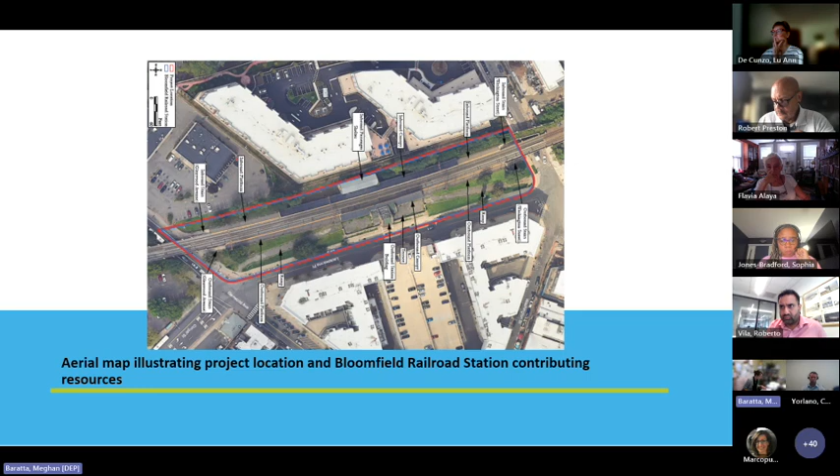As described in the nomination, Bloomfield Railroad Station is an exceptional architectural and engineering achievement that distinguishes itself from other early 20th century DL&W Railroad suburban stations for its innovative and artful use of ferroconcrete and as a distinguished example of proto-modern architecture that includes Beaux-Arts elements. The manipulation of the materials and fittings is unique to the station and exhibits an honest expression of the material, sparing use of ornamentation and careful consideration of the massing parts.

This shows the outbound passenger station. The original nomination was completed in 1984 and did not identify character-defining features of the station. The HPO agrees with the applicant's consultant that some significant architectural design elements of the Bloomfield Railroad Station consist of the following: the overall footprint, massing, and orientation of the station buildings, pedestrian tunnel, platforms, canopies, and stairs, all of which contribute to the architectural significance of the entire railroad complex.

Any surviving original historic materials, including the glazed brick in the pedestrian tunnel and poured-in-place concrete elements that feature a mix of exposed aggregate and smooth finishes, the half butterfly canopy design at the inbound and outbound platforms, poured-in-place concrete, overall fenestration pattern, glazed rookwood tile ornamentation on concrete exterior walls, gable roof lined with parapet gable ends, clay roofing tiles on the outbound station, riveted metal canopy on the outbound station, arch porte cochere at the outbound station, concrete embankment wall with terrace ramps.

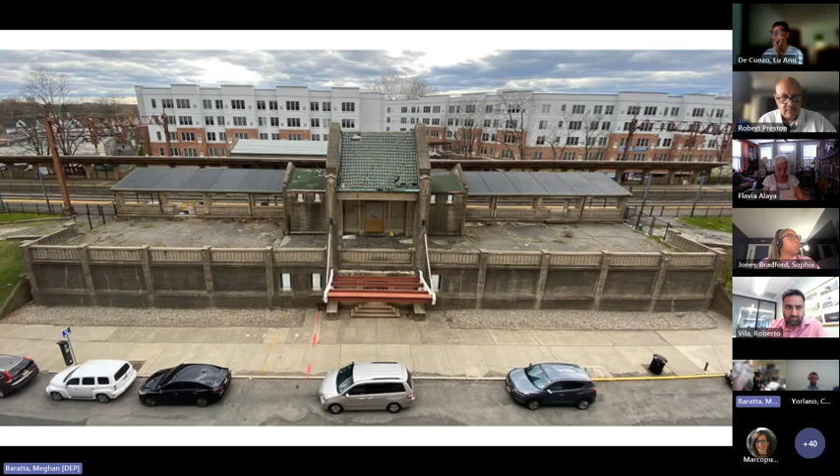The project is being funded through the New Jersey Debt Defeasance and Prevention Fund, which has set aside $48 million for improvements at Bloomfield Railroad Station.

Bloomfield Railroad Station is currently owned by Bloomfield Township. Bloomfield Township and New Jersey Transit are currently in negotiations for New Jersey Transit to take ownership of the property. To date, no formal agreement has been signed between Bloomfield Township and New Jersey Transit regarding the transfer of ownership.

The station requires various state of good repair and site improvements to the grounds, station buildings, platforms, and pedestrian tunnel. It also requires modifications for compliance with the Americans with Disabilities Act.

New Jersey Transit's preference for full accessibility includes providing level boarding via high-level platforms for the full length of the station's inbound and outbound platforms.

The outbound station building and pedestrian underpass tunnel connecting the inbound and outbound station buildings are dilapidated from years of neglect and in poor condition. The outbound building and underpass tunnel are currently closed to the public. They require extensive rehabilitation to bring them into a state of good repair and to allow them to be reopened for public circulation.

The grounds and retaining walls on the outbound side of the station, as well as the concrete stairs and retaining walls at either end of the platform on both sides of the station, also require restoration.

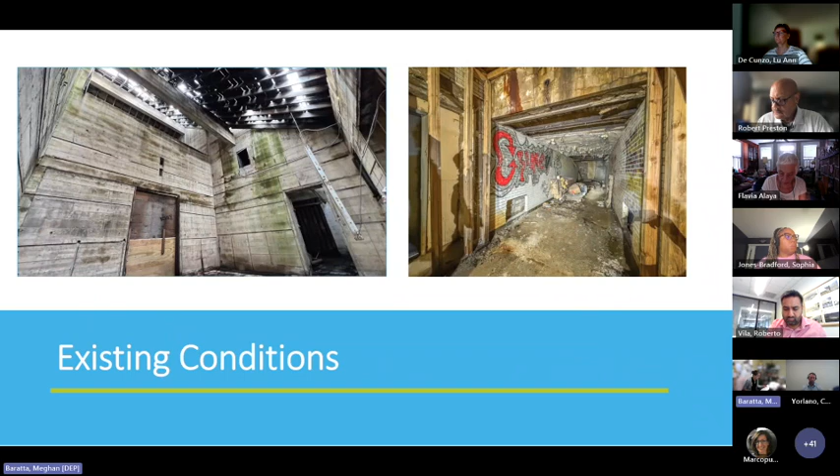The following exterior project elements are part of the preferred alternative as submitted by New Jersey Transit and do not meet the standards. The historic inbound and outbound low-level platforms are proposed to be demolished.

A new high-level cast-in-place concrete platform is proposed to be installed at 4 foot 3 inches above the top of rail on both the inbound and outbound tracks. The increase in height would put the new platform high above the existing historic balustrade.

A landing well would be created in front of the existing inbound station building's doors, at the platform level. This landing well would be necessary to provide access between the existing inbound station waiting room and the new high-level platform. This landing is similar to the configuration at the entrance to Newark Broad Street Station.

New ADA compliant stairs would be provided on the north side of the landing, and a new ADA accessible ramp would be provided on the south side of the inbound station, south of the station complex.

The existing platform canopies will be removed and replaced with structural steel and metal canopies to allow for increased headroom clearance because of the 4 foot 3 inch change in height of the platform.

New Jersey Transit states that the proposed new canopy roof would be a similar half butterfly shape as the existing canopy, but the material will not be the same.

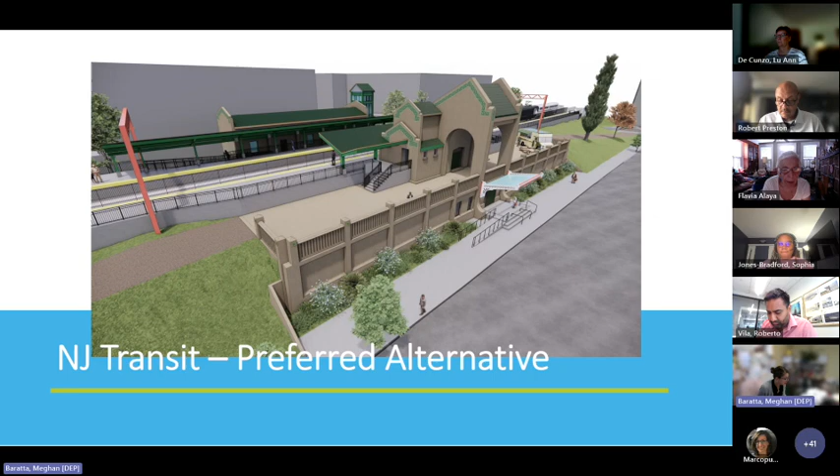In a technical assistance letter from the HPO to New Jersey Transit, the HPO provided the following guidance for ADA accessibility: that USDOT FTA gives guidance for ADA review, level boarding, and between-car barrier for commuter rail. It describes the review, analysis, recommendation procedures, and reporting requirements expected by the Federal Transit Administration and the project management oversight contractor regarding recipients' compliance with level boarding and between-car barrier provisions of the regulations issued by the U.S. Department of Transportation.

New or altered stations serving commuter, intercity, or high-speed rail lines or systems, in which track passing through the station and adjacent to platforms is shared with existing freight rail operations, the railroad operator may comply with the performance standards by using one or more of the following means: level entry boarding, car-borne lifts, bridge plates, ramps, or other appropriate devices; mini-high platforms, with multiple mini-high platforms or multiple train stops as needed to permit access to all accessible cars available at the station; or station-based lifts.

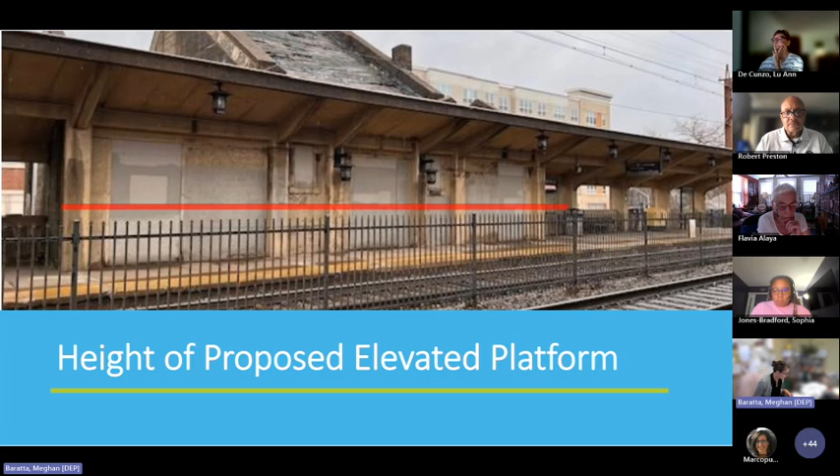New Jersey Transit considered the following 8 alternatives. Alternative 1, no build. In this alternative, New Jersey Transit considered a no build option. There would be no direct physical effects to Bloomfield Railroad Station.

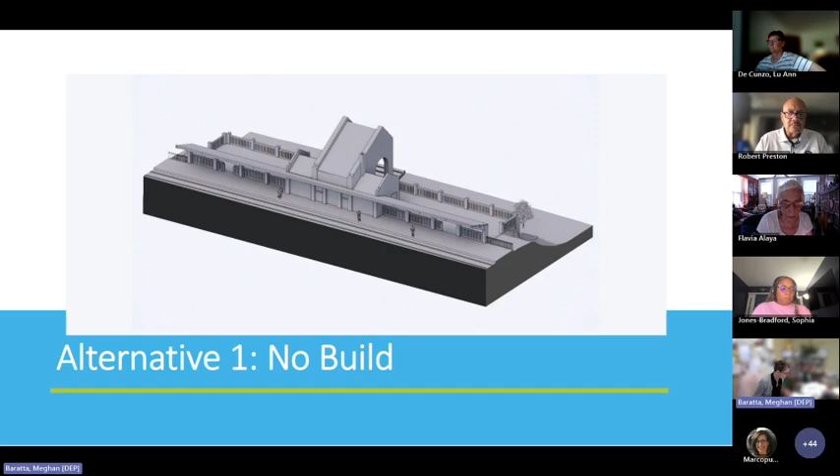New Jersey Transit decided that this alternative would not meet the project purpose to improve passenger experience or address the need for ADA accessibility, nor repair or restore any of the historical features of the station, leaving the already significant state of disrepair conditions present to deteriorate further.

Alternative 2, mini maxi high platforms. In this alternative, New Jersey Transit considered ramps, otherwise known as mini high platforms, and larger ramps the size of a train car or longer.

The project scope in this alternative includes retaining existing outbound canopy, and a majority of the inbound canopy would be retained except for the ends of the canopy. Existing platforms under the existing canopies would remain.

Existing platforms beyond the ends of the existing canopy would be replaced with mini high or maxi high level platforms. Ramps and stairs would connect the existing platforms and high level platforms. New elevators would provide accessible routes level to existing platform levels.

Landings with roofs would be added for access from the top elevator stops to platforms. Stairs at the ends of the platform would be renovated and extended to the new platform, and existing areas of the station building would be rehabilitated.

According to the application, this alternative does not accomplish New Jersey Transit's goals for accessibility with level entry boarding for the full length of the station's inbound and outbound platforms because it limits passengers with mobility needs to only 2 cars on the train.

According to New Jersey Transit, there is a considerable distance to the accessible path into and out of the station. It also creates the potential for a false expectation of level disembarkment, and the mini maxi high platforms would have no shelter.

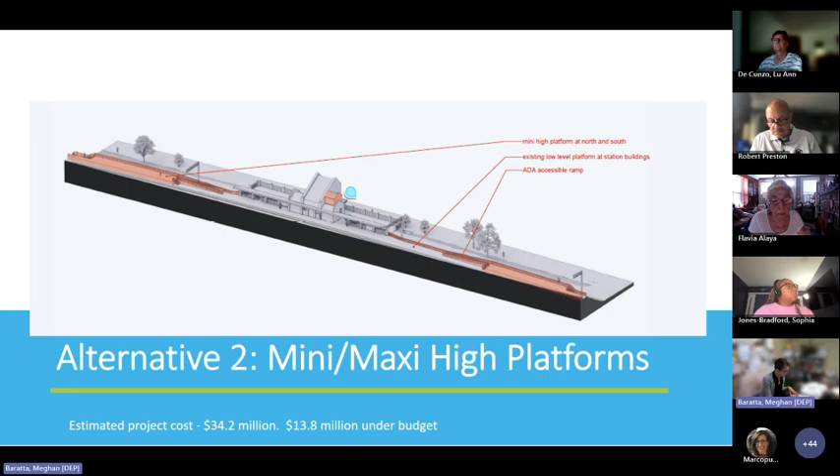Estimated project cost for this alternative is $34.2 million and is $13.8 million under budget. This alternative meets the project purpose and need while retaining the historic integrity of the station complex and is the most appropriate design under the standards.

Alternative 3, shifting the platform location. In this alternative, New Jersey Transit proposed to shift the platform location so that a high-level platform equal to the length of the existing platform would be provided either north or south of the existing location of the station, with a ramp providing access underneath the existing canopies.

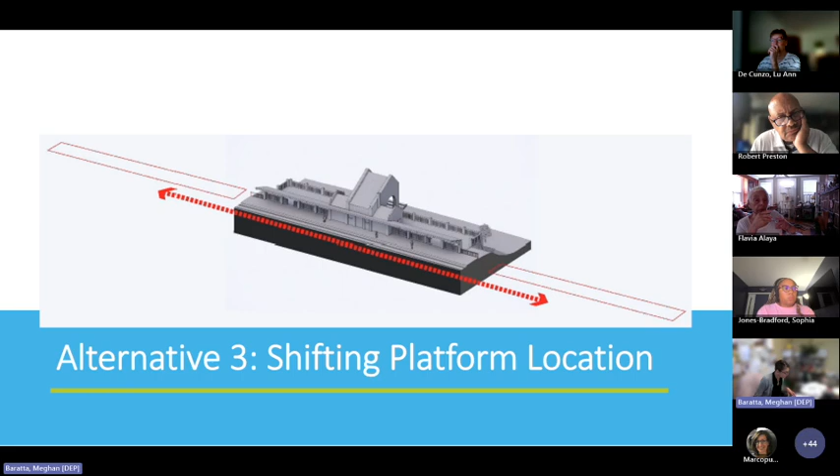This alternative was not fully explored because it would require land acquisitions, making it an infeasible alternative due to cost. Project cost was not estimated.

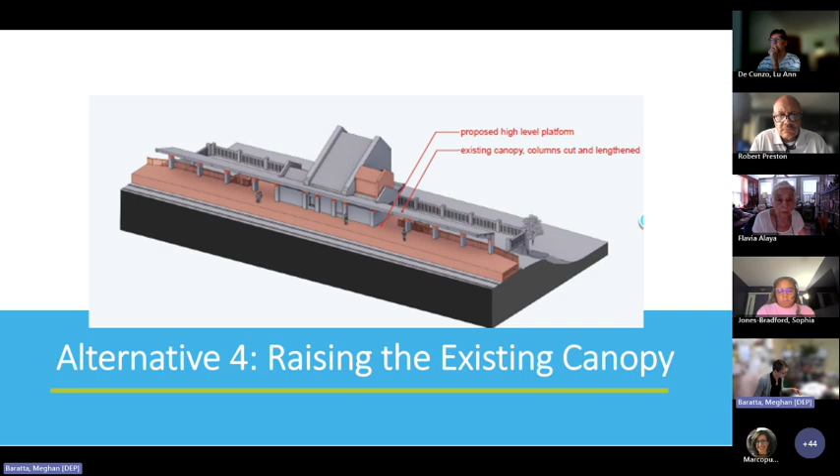Alternative 4, raising the existing canopy. In this alternative, the existing canopy would be raised. This would include cutting the existing canopies at the columns, lifting them in place, elongating the columns, and reattaching the canopies. This alternative was dismissed due to engineering and cost concerns. Project cost was not estimated.

Alternative 5, blending existing and proposed canopies. In this alternative, as noted in the application, New Jersey Transit proposes to replace a section of the existing concrete canopy with new steel canopies. Most of the historic canopy would remain with reduced platform area below. This alternative would retain the existing canopies, except at access points to the elevator and stairs, with new raised canopy bays at these locations.

The existing platforms would remain under the existing canopies. Beyond the end of the existing canopies, a new full-width, high-level platform would be added beyond the ends of and under the existing canopies. New partial width, high-level platforms towards the boarding side of the platform would be added.

New elevators would be installed to provide accessible routes from street level to high-level platforms. The massing of the existing outbound building would be raised to accommodate the hoistway requirements. The stairs would be renovated at the ends of the platforms and extended up to the new platforms. Existing areas of the station building would be rehabilitated, and the existing platform areas would remain under existing canopies, but would be inaccessible.

In this scenario, the majority of the existing canopies remain and a portion of the existing platforms remain. The full length of the platform would be usable for passengers boarding and exiting levels within the existing station buildings, and the existing station buildings remain largely intact.

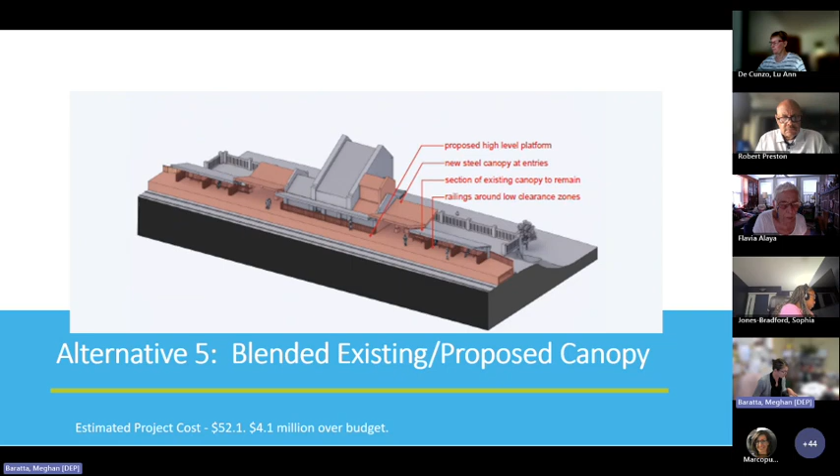Alternative 6, existing canopy removal without replacement. In this alternative, New Jersey Transit proposes to completely demolish the existing historic canopy with no new canopy installed. New Jersey Transit acknowledges that the drawback in this alternative is that passengers would not have shelter on the platform, thereby reducing passenger comfort and experience compared to the existing station condition.

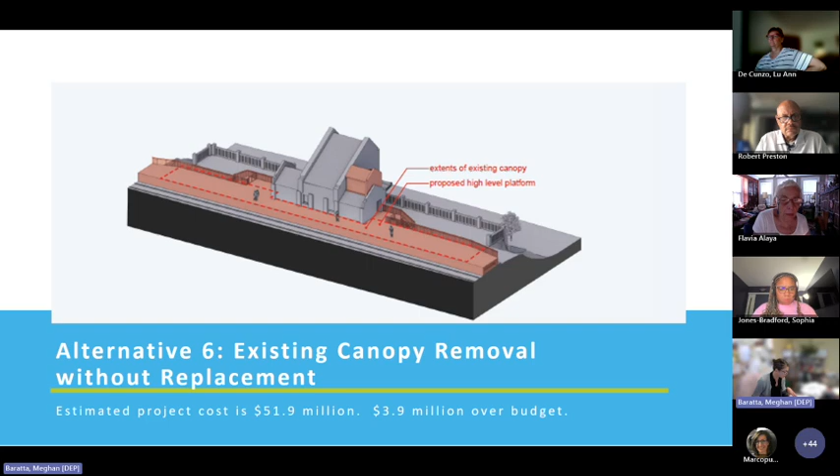Estimated project cost for this alternative is $51.9 million and is $3.9 million over budget.

Alternative 7, full canopy replacement. In this alternative, New Jersey Transit proposes to demolish the existing canopy and replace it with a new steel canopy to maintain the existing canopy coverage at both platforms.

The existing platforms and canopies would be replaced in their entirety with high-level platforms and higher canopies. New elevators and ramps would provide accessible routes from street level to raised platform level. The massing of the existing building would be altered to accommodate the hoistway requirements in the outbound station building.

Landings with roofs would be added for access from the top of the elevator stops to the platforms, and the waiting room at the inbound platform would remain at lower level with a ramp and stair to the raised platform. The stairs at the ends of the platform would be renovated and extended up to the new platforms, and the existing areas of the station building would be renovated.

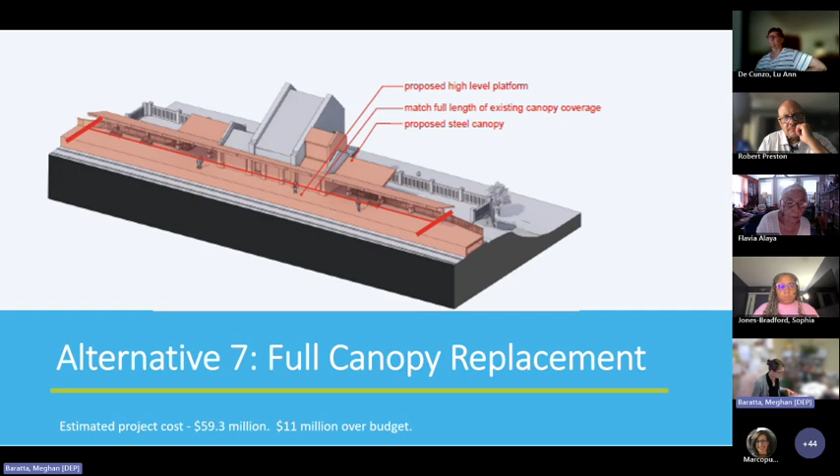No analysis was given as to the benefits or deficiency of this alternative. The estimated project cost for this alternative is $59.3 million and is $11 million over budget.

Alternative 8, partial canopy replacement. This is New Jersey Transit's preferred alternative. In this alternative, New Jersey Transit proposes to demolish the existing concrete canopy and replace it with a new steel canopy with 30% coverage at the inbound platform and 15% coverage at the outbound platform.

New elevators and ramps would provide accessible routes from street level to raised platform level. The massing of the existing building would be raised at the outbound station building to accommodate the elevator hoistway requirements, and landings with the roof would be added to access from top elevator stops to platform.

The waiting room at the inbound platform would remain at the lower level with a ramp and stairs to the raised platform. The stairs at the ends of the platform would be extended up to the new platforms. All other existing areas of the station building would be renovated.

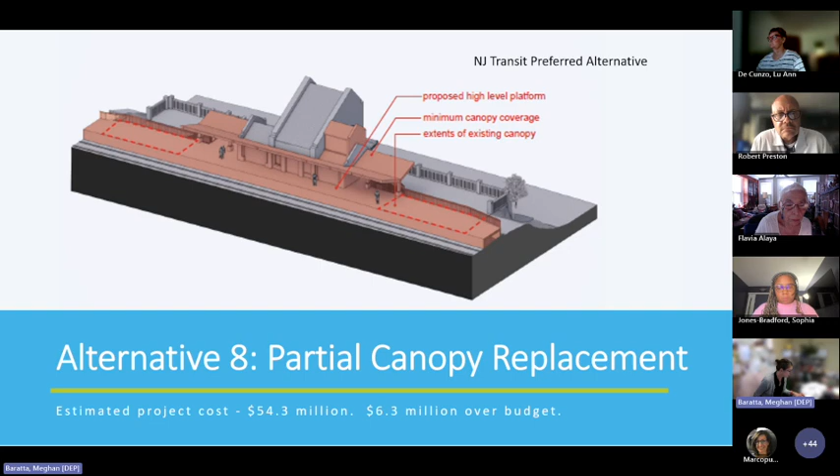No deficiency in this plan was provided by New Jersey Transit. The estimated project cost is $54.3 million and is $6.3 million over budget. This is the applicant's preferred alternative.

On July 31st, 2024, HPO learned of Amtrak stations that use MobiLift CX, a multi-purpose wheelchair lift that can be wheeled by train conductors to the train car where it is needed, thus enabling every train car to be accessible without negatively impacting the architectural integrity of the historic resource.

On August 1st, 2024, HPO staff shared the MobiLift CX platform brochure with New Jersey Transit staff for consideration in this project design. HPO staff has not received a response as to whether or not this alternative was viable at this station. New Jersey Transit has proposed the following measures to mitigate the encroachment.

HPO review and consultation: we would conduct consultation with New Jersey HPO to ensure the design of the proposed project is guided by and responsive to the standards to the extent feasible, to ensure the design, character, materials, qualities, and workmanship of the rehabilitated Bloomfield Railroad Station are compatible with the historic and architectural character of the overall station complex.

As part of design consultation, the NJHPO would be provided an opportunity to review the design plans at 30, 60, and 90% stages of design development, as well as review the 100% design package prior to the initiation of the construction bidding process.

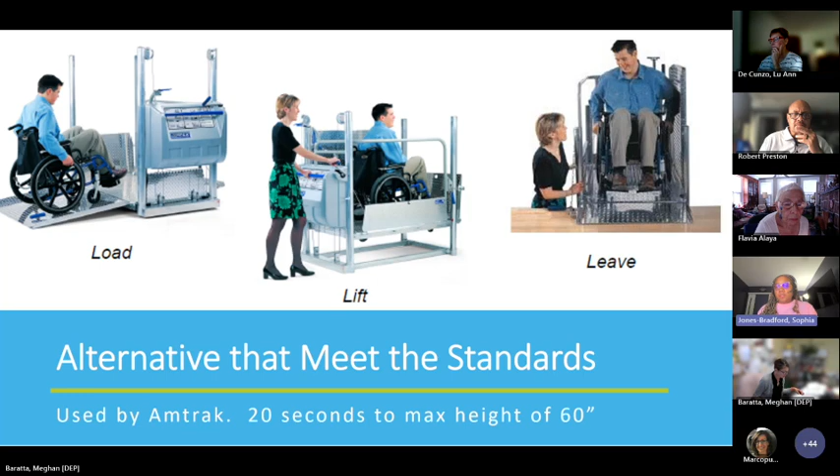Sorry, just someone that's asked, fine. Are you intending to progress the slides, or leave them? No, slide this up. What I'm reading is what New Jersey Transit is proposing to us. So it's HABS Level 3, and then the last one is a model of Bloomfield Railroad Station. So this is all in your resolution.

New Jersey Transit proposes to design and fabricate a three-dimensional model of the original Bloomfield Railroad Station to be placed on permanent display within the interior of one of the station buildings to document and preserve the original design of the architecturally significant station. Development of the model could be informed by laser scanning of the railroad station and review of available original drawings for the station complex.

The model could be accompanied by an interpretive display and combined with the recommended mitigation measures for interpretive signage or display. In addition to the physical three-dimensional model, a digital model of the Bloomfield Railroad Station is recommended to be designed and made available on a publicly available website that would also include other interpretive materials to detail the architectural and historical significance of the station, its architect, and the DL&W Railroad.

The other interpretive material could include, but not be limited to, historic photographs, images, illustrations, drawings, and other digital media that facilitate documenting and detailing the station's history and significance. So that is all the mitigation that New Jersey Transit is proposing.

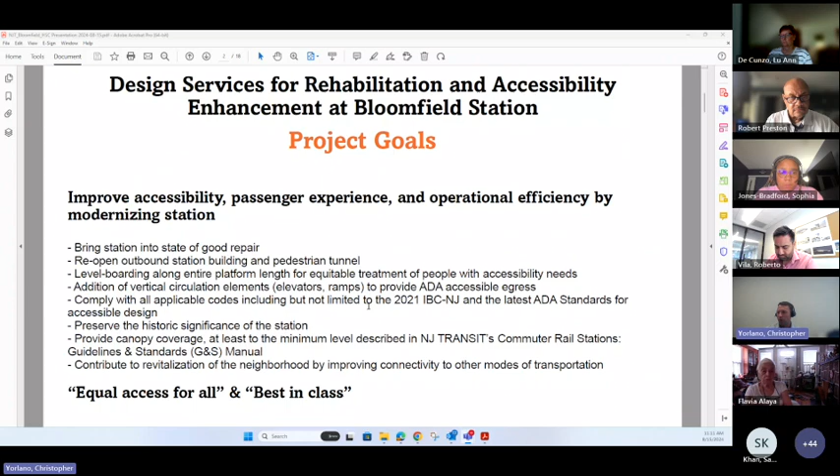There's a lot of transit-oriented development going on currently in the surrounding community of Bloomfield. When we talk about this, what we're really looking for is how we can provide equal access for all while also creating a best-in-class design at this station.

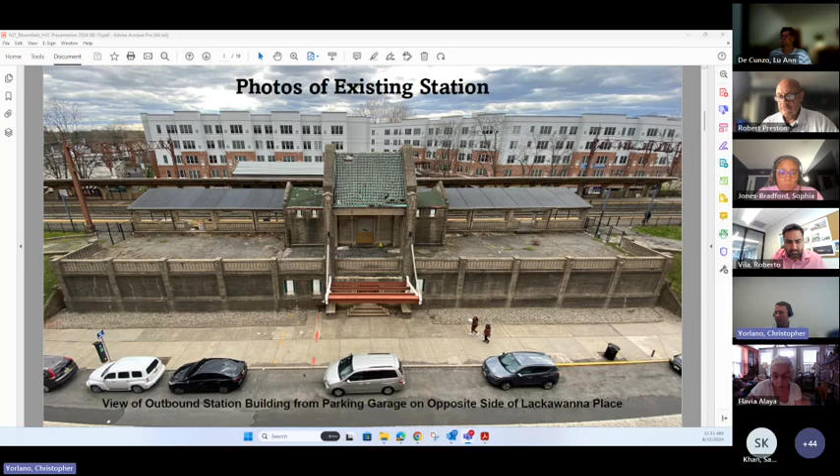We've seen this photo already from the previous presentation. Just to show you again some photos of the existing station - you have the outbound building here as viewed from the parking garage across Lackawanna Place, where we can see that the outbound building is in a state of disrepair.

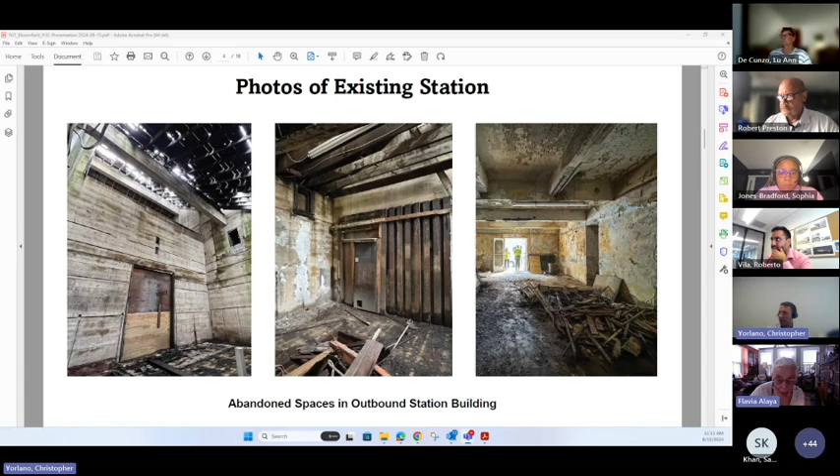Some photos of the interior shots of the outbound building. The left and middle photos are rooms on the platform level of the building, and the photo on the right is looking east out the door towards Lackawanna Place of the vestibule area on the ground floor level of the outbound station building. Just some general photos showing the platform, canopy, and one set of stairs at one end of the platform.

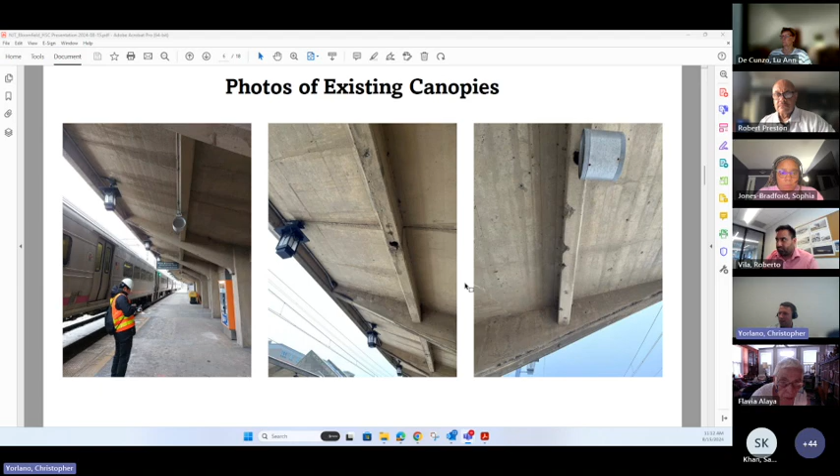We have some photos of the existing canopy, which you can see has had some deterioration. It's been patched in certain places, and there are other places where there's spalling and cracking that are showing additional signs of deterioration to the concrete.

This is just one photo looking at the outbound station building, trackside elevation from the inbound platform. You can see here as well that the openings and access points to that building have been boarded up, as the outbound station building is not publicly accessible.

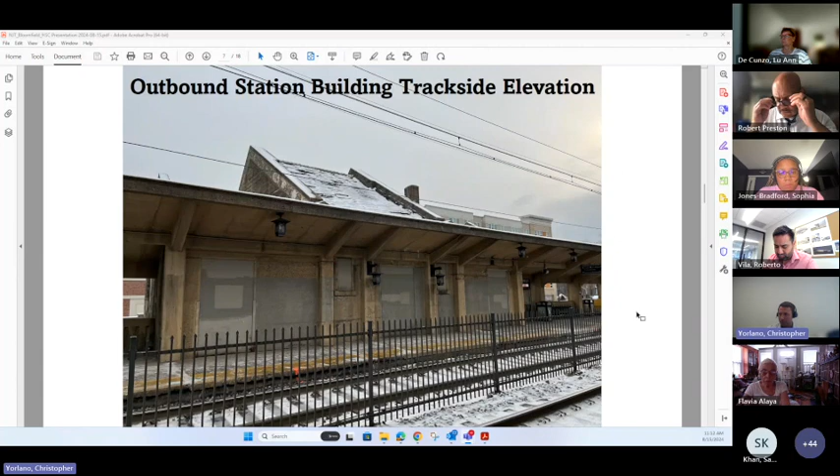We've kind of already brought it up in the previous presentation, but how are we going to provide level boarding throughout the station without destroying the historic character of its original construction? There are really two alternatives.

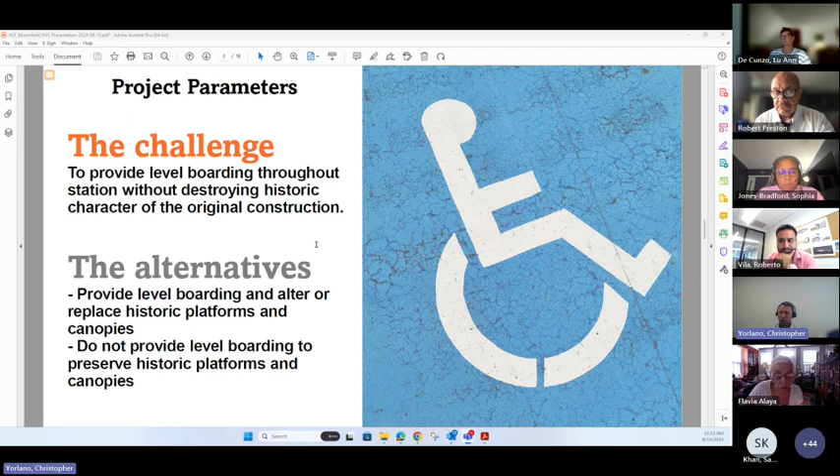The first one is we can provide that level boarding, but it will require the need to alter or replace the historic platform and canopies, or we can provide limited level boarding, but not level boarding throughout the station, in order to preserve the historic platform and canopy.

If you start looking at options such as the mini-high platform, what that ultimately can do is create reduced platform boarding. You're going to have mini-highs at one or other ends of the station.

When you talk about accessibility, you're talking about not just wheelchair-bound passengers, but folks who may have strollers or luggage who are going to default to using the high level platforms at either end of the station. You may also have folks who just don't want to climb a set of stairs to board the train. And what you end up having is bunching on the platform, with folks being sort of herded to certain areas in order to board or disembark the train.

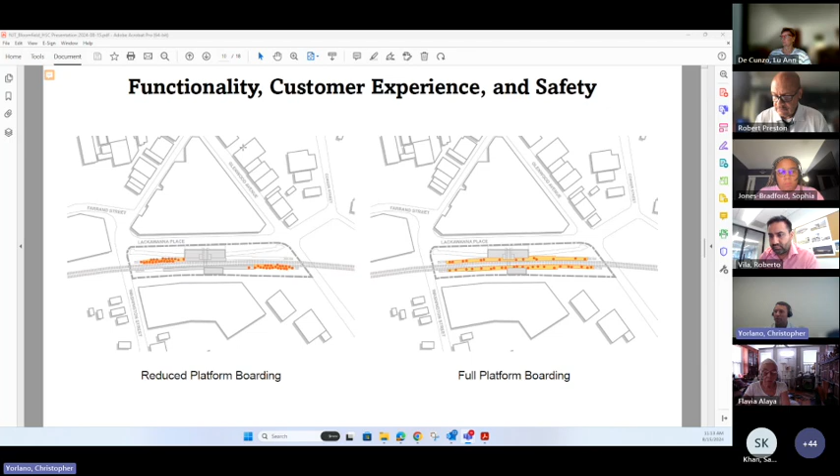Whereas if you have full platform boarding, you're able to spread out the passengers on the platform while they wait to board an incoming train. This really speaks to functionality, customer experience, and safety, all of the above.

We talked a little bit about this already - there are some parameters and excerpts from the FTA about providing level entry boarding, or exceptions to this if freight rail is potentially operated or is operated on the line. All of these bullet points were discussed previously by Megan.

However, when we look at this, we interpret it as level entry boarding is listed first. So therefore, if you look at it that way, you could interpret this to mean if there's an opportunity to find a way to provide level entry boarding, it should be done.

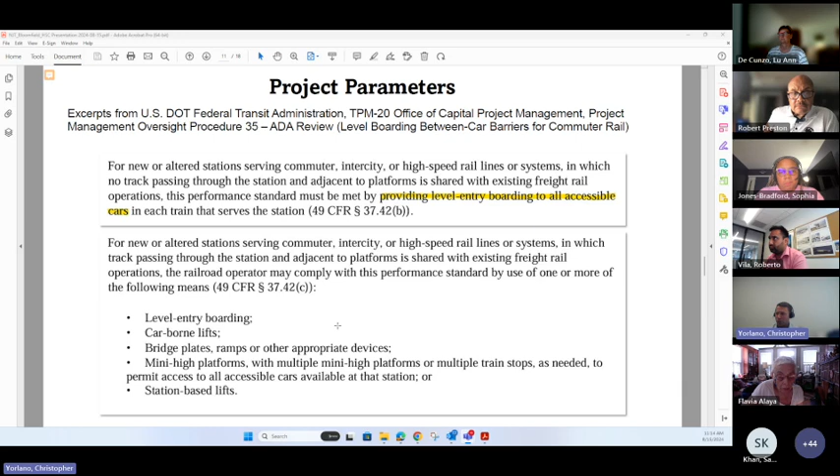And if it's not possible or feasible, then you can look at these other opportunities that will not necessarily provide level entry boarding throughout the station, but will provide some form of ADA compliance.

We talked about the platform considerations, and really I think this image here on the left is something to help illustrate our concerns about putting a high level platform in while retaining the existing canopy structure.

You can see here that raising that platform approximately 4 feet ends up reducing the circulation width significantly on the platform to less than 5 feet when you consider that the 2-foot warning strip is really not an area that should be used by passengers for circulation due to safety issues with trains passing through the station or even trains arriving and departing the station.

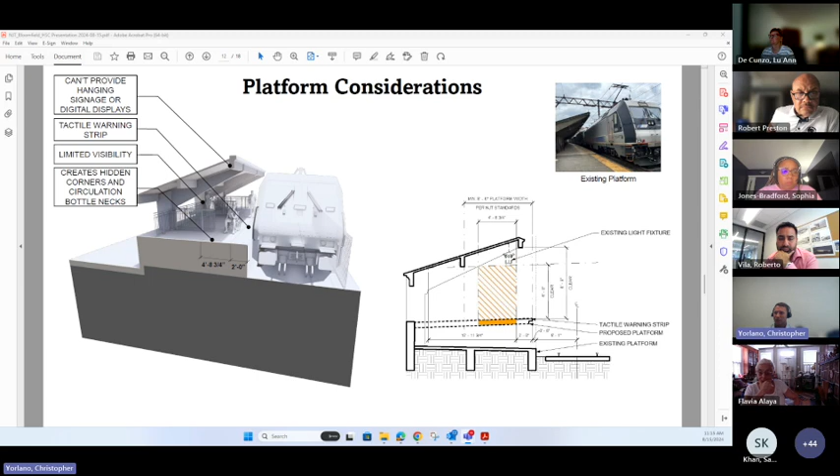You also have limited visibility that's caused by the cantilever beams that are supporting the roof, and you create pinch points here that can create safety concerns as well as visibility concerns.

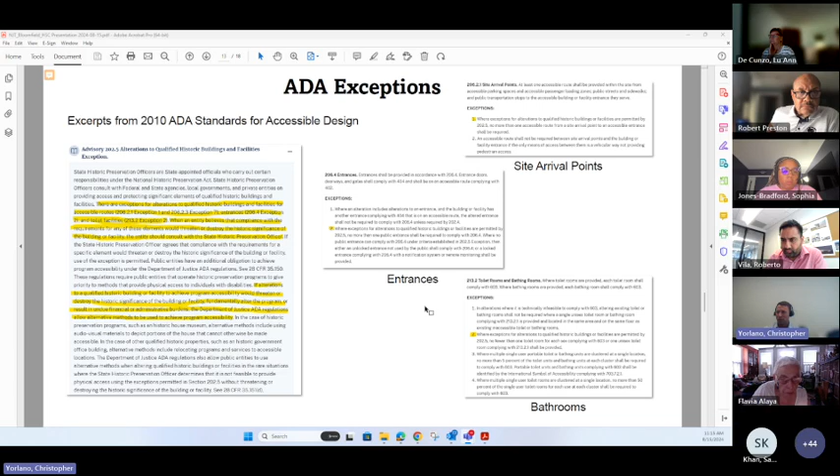We did look at these ADA exceptions, and 202.5 was already discussed by Megan in her previous presentation. So we did understand that there are exceptions that can be considered for stations that have historic significance or are on this list of registered historic places.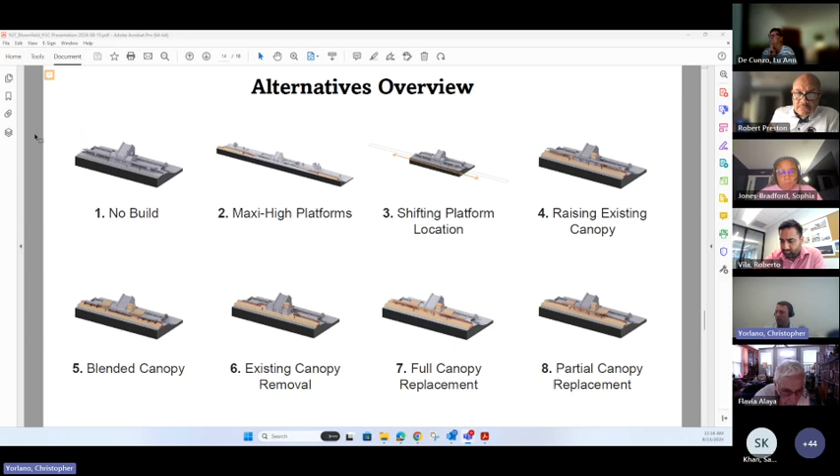So under this alternative, here's just sort of an updated rendering that shows both sides of the station. Again, this meets the minimum canopy coverages that are outlined in New Jersey Transit's guidelines and standards manual. It does allow for a state of good repair to be achieved in the outbound building and pedestrian tunnel.

It's going to achieve all the stated project goals because it will allow for high-level platforms to be installed throughout for the full length of the station. It's a lower cost alternative than the full canopy replacement as was previously demonstrated.

Obviously, there is a drawback in that you need to remove the historic canopies and platforms to do this, but given that we are proposing a canopy option that in some ways replicates the look of the butterfly canopy effect, the butterfly canopy that's currently there, that's reinforced concrete.

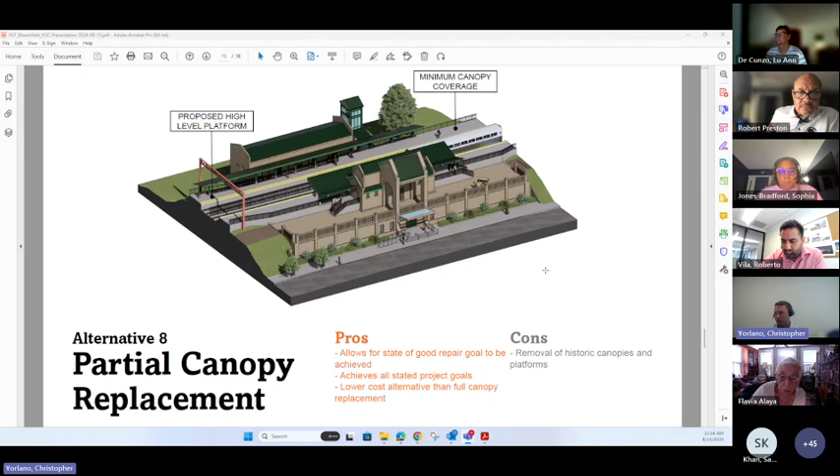So, why does this ultimately provide the best passenger experience? This rendering here on the right sort of should be compared against the rendering we previously showed. By raising the platform, putting in a new canopy, you created a circulation width that exceeds 12 feet. It's very similar.

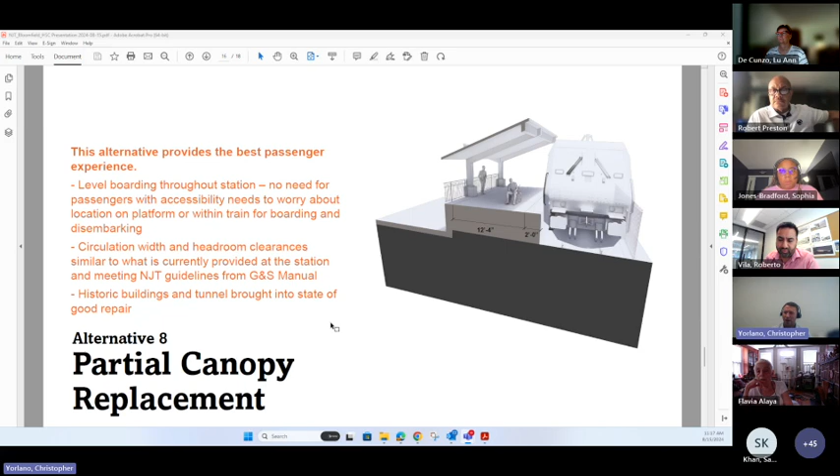Currently out at the station with the low-level platform, but it's providing level entry boarding throughout. There's no need for passengers with accessibility needs to worry about where they're located, where they're boarding or disembarking the train. And then, besides the circulation improvements, we are still providing state of good repair to the historic buildings and the tunnel, which have fallen into a state of disrepair and are currently not used by any station passengers.

So just, in conclusion, why is Alternative 8 the preferred concept for New Jersey Transit? It's going to implement best safety practices. It's, implicitly, level boarding is just safer. And if you can do that throughout the station, you're creating the safest possible boarding and disembarking opportunities for all passengers. It provides better passenger experience through cumulative improvements.

There's going to be better lighting and you're going to make sure that there's not a claustrophobic feel that comes with keeping an existing canopy but raising the high level platform.

You're providing a modern station design that exceeds the minimum code requirements, and that's something that New Jersey Transit really wants to emphasize here. When they talk about best in class, it's not just about meeting the minimum code. Sure, mini high platform, maybe that is meeting the minimum code, but to modernize the station, to create really a best in class design, you don't want to rely on a mini high platform.

You want to have a station where no matter where anyone boards, they're going to have level boarding. Level boarding also improves rail operation efficiency. It was brought up about the Mobi lift, and we can discuss that in more detail. But the reality is using a Mobi lift actually will slow down rail operation efficiency, slow down train times, because it will take longer for people who have accessibility needs to board the train.

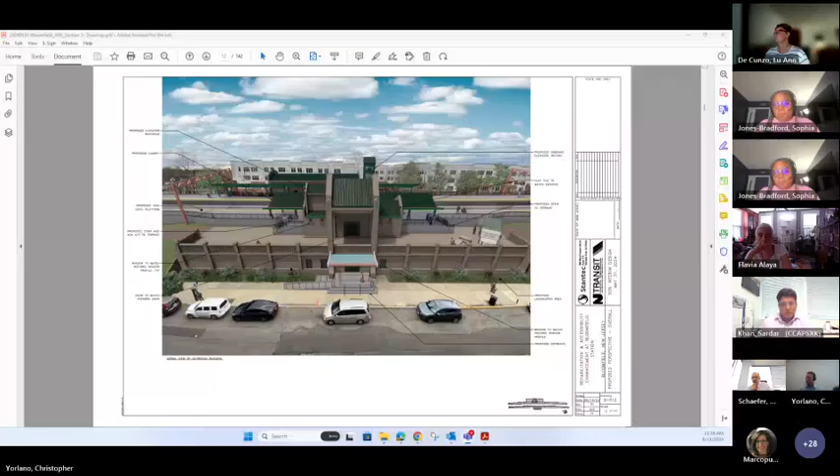While he's looking, how do you intend to make up the shortfall of the funding that would seem to exist with your preferred alternative? It just fits — it's a squeaker within the budget. And if it does wind up to be a shortfall, what we typically do when projects run over budget, which fortunately for us is very rare, is defer another project that was planned for 6 months to a year, and devote that funding stream to this to finish it. Under no circumstances will we leave this half done, if that's your concern, sir.

Thank you. I have a question. Sure, go ahead, Flavia.

You're on mute, ma'am. I'm sorry about that. Is it unmuted now? You're good, yes ma'am.

I don't remember whether the application included statistics on ridership. So if you could revisit that, could you tell us whether stations that have raised platforms similar to the one you're trying to do in Bloomfield have seen improved ridership?

It's an interesting conundrum of transit that we don't really have the opportunity to chase areas that are growing. We usually end up chasing them after they've already grown, Bloomfield being an example. High-level platforms generally come into play when we can no longer safely handle what's going on at the various stations' ridership. So unfortunately, we're still very reactionary in that. I hope one day to be proactive.

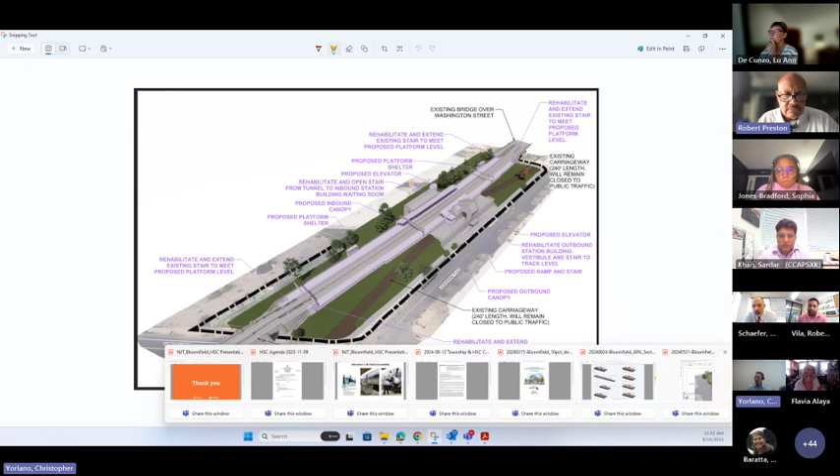You're depicting a food truck on the platform area here? I'm sorry, this is the terraced area beyond the platform—taking it back to this terraced area that's currently fenced off and closed to the public, only accessible with a key lock for maintenance purposes. We've envisioned that as a potential use. It hasn't been fully developed yet, but it's something we've been discussing with New Jersey Transit—how, when revitalizing the exterior of this building, we can also reimagine it for additional use beyond just passenger circulation.

Continuing, do you have any documentation regarding the landscape as it existed during the period of interpretation, and how does what you're proposing relate to this landscaping that is part of the historic fabric of this building?

We have some images and general understanding of the material used for the carriageway. The embankments were really an embankment on fill with some grass and shrubbery landscaping. At the time, it was exactly what's been defined as a carriageway, so folks arrived up those carriageways and used this covered archway to access the building and the tracks. There was a baggage elevator and baggage room for people coming and going. It's not designed to take vehicular traffic, nor would we want to push people to use it for that purpose.

But Rich, go ahead, if I may, sir. Yes.

It's something where we saw an opportunity—it's not part of the platform proper, but it is an opportunity. I believe this was originally where people would take carriages up and unload right under the covered porch. The idea was to revitalize that area, encourage people to engage the building proper, and give local businesses a chance to bring food trucks during business hours. As Chris said, it can't function as ADA, but if there's an opportunity to do additional historical research and improve the site in a compliant way that meets the purpose and need of making it attractive to the community and restoring it historically, that would be a fantastic idea if that's where you were going with it, sir.

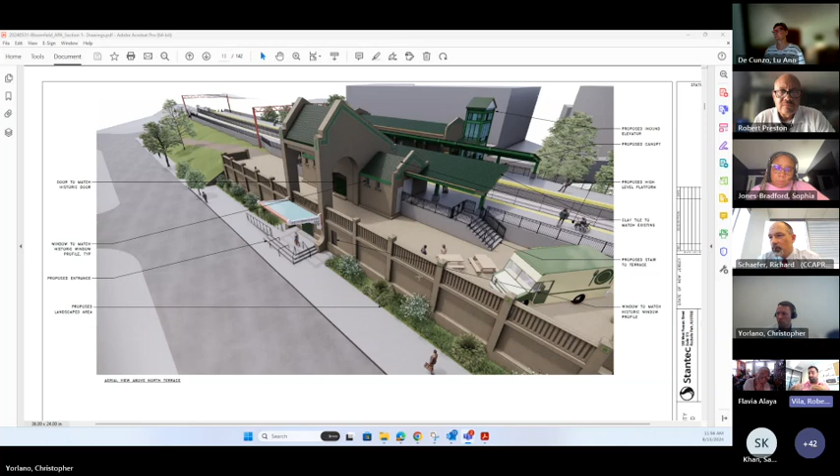Yes, we do have started an archive of historic photos, and we're trying to research the historic fabric, not only for elements like doors and ceilings, but we also have been looking at the landscape. Older archives of photos show a lot of trellises along the concrete walls at ground level. We spoke about that with our conservators and architects, and they didn't advise going with that approach because we'll seriously damage the concrete at this stage. That's why we show a lower type of landscape along the walls.

So that's already addressed, continuing the integrity of the wall. Since Craig mentioned how important it is for this station to be intermodal, not only transit, because we've got buses, around three bus stops at the corner of Lackawanna, we discussed how to integrate that into our design. We talked about making a small plaza that would welcome passengers coming from the bus to the transit area, and that plaza could be an opportunity for historic displays showing some of the historic value of the station and the neighborhood. So we've been discussing those ideas.

Any other questions or comments from council?

I wondered if the alternative preferred by the department that was presented to us was also Sophia's preferred alternative, or whether, when she commented on the historic character of the building, that was a critique also of the preferred alternative.